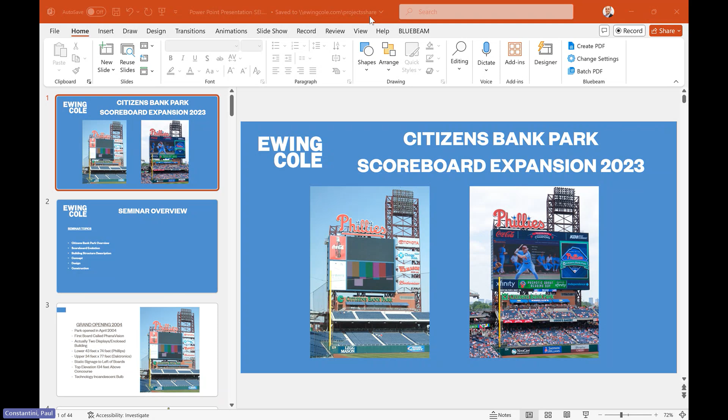Hopefully everybody will enjoy a little bit of this behind-the-scenes tour of what the Scoreboard structure is and get to learn a little bit about how we were able to pull it off.

I'm basically going to tee this one up for Mary, give you a brief introduction, and then Mary's going to really walk you through, as the lead structural engineer on the project, how we were able to work with the ownership of the Phillies and our interior architects to come up with a display board that would work for them and how to make it all come together.

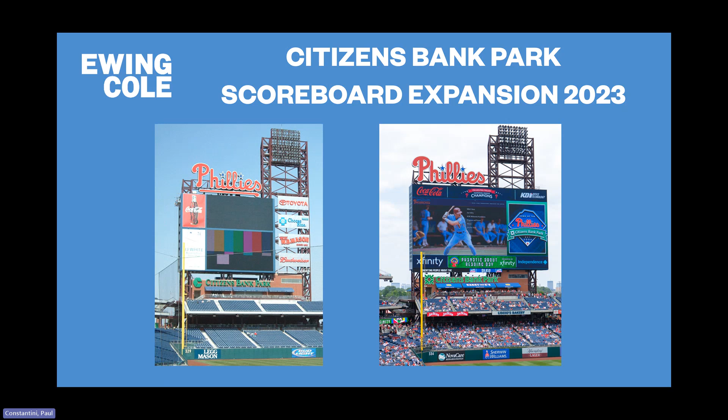So to start with, you could see basically what the park started as and where we ended up, and hopefully you'll have a better understanding of what went behind the scenes, the drawings, and the calculations to make this all come about.

We intend to cover a whole bunch of topics, ranging from a brief overview of the park's evolution from its original design and construction in the early 2000s, to the Scoreboard evolution as the park evolved through different phases from 2004 to present day.

And then we'll get a little more in depth with what the physical Scoreboard structure is, the concept of how we were able to look at various opportunities for Scoreboard displays, and then go through the design and construction.

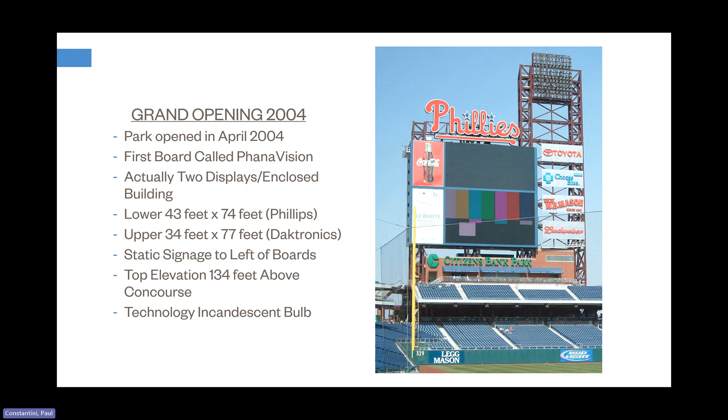Citizens Bank Park opened in 2004, designed by Ewing Cole. The first board ever displayed was actually a combined board of two different displays. The lower display was a Phillips product, and there were two different display manufacturers for the original board. The lower board was around 43 feet by 74 feet.

The upper board was 34 feet by 77 feet, topping out at around 134 feet above the concourse level, which is down at the seating.

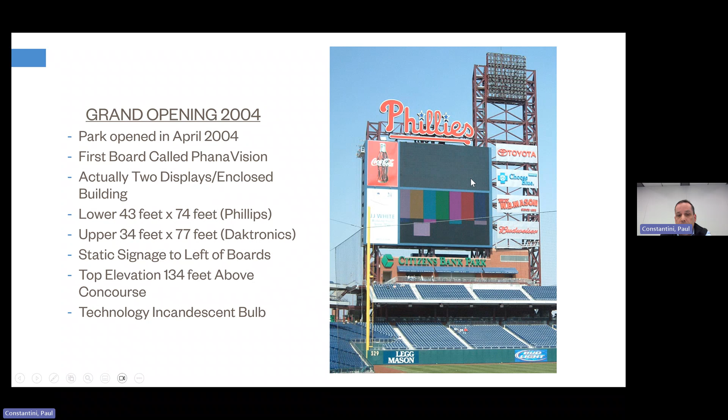There was also some static signage over the area of the Scoreboard, and lighting displays or lighting arrays for the field lighting. The original Scoreboard technology was in its infancy, using incandescent bulb technology.

A little bit of behind the scenes of what makes up the Scoreboard area and that whole structure — we call it the Scoreboard building. That building is located and supported off of the box columns that are part of the lighting arrays and the support of the video board.

The video board sits proud of the structure for the display and lighting arrays, providing access for catwalks and various service to the back of the board for its operation.

Below the video board building is some restaurant space, then the seating tiers, and further below grade you've got service utility tunnel work and other behind-the-scenes infrastructure associated with ballpark operations.

Mary will talk a lot about the substructure and the structure of the display support, because it was all critical to evaluate what we were actually going to be able to accommodate with the existing structure for the new display.

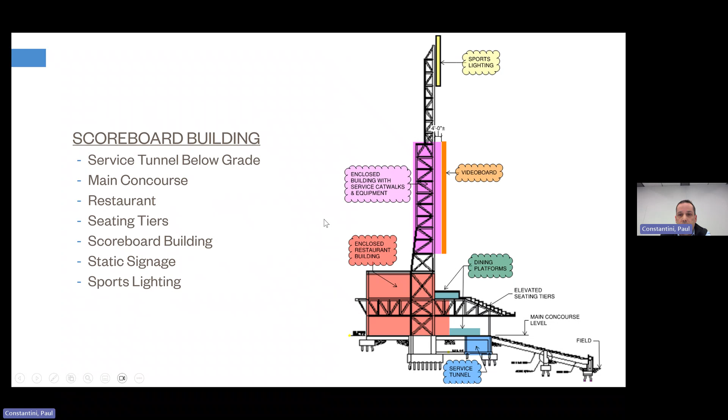Quickly looking at the display structure — this is an early photograph of it under construction back in the early 2000s. You can see it's primarily 4 large box columns there to support both the display board and the field lighting array.

The 2 box columns that support the display board top out at about 150 feet above the concourse level, whereas the sports lighting array tower goes up another 50 feet higher, to around 200 feet above the concourse for the sports lighting arrays.

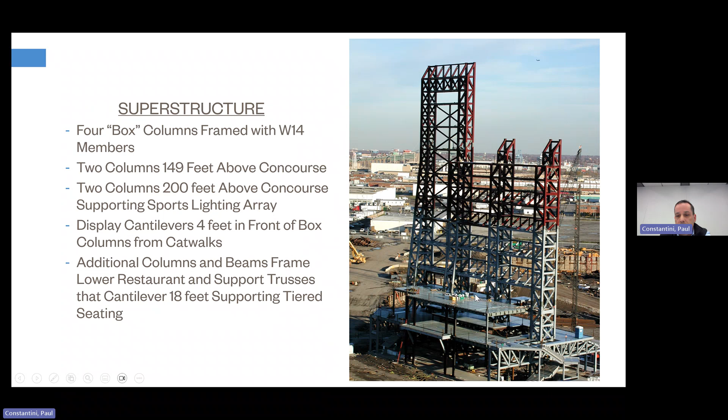As I mentioned, the display itself for the video board cantilevers off of this structure towards the field around 4 feet, providing room for catwalks and service access to the display modules from behind. There's also additional framing, beams, columns, and trusses that support the various seating tiers and the elevated floor over the restaurant area.

A little bit about foundations. The foundations are a very deep structure. They're 120-ton steel, roughly 12 3/4 inch diameter pipe piles. And each of the box columns, with different loading and wind loading on it, has pile support.

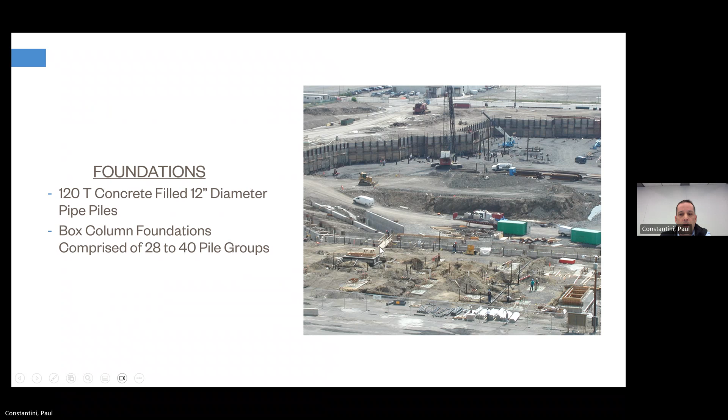In 2011, around 7 or 8 years after the park was opened, the Phillies wanted to entertain an upgrade to the display. So in 2011 they rolled out a high-def display, which took the two displays original to the ballpark in 2004 and combined them into one large display measuring around 76 feet by 98 feet, with the Phillies logo on top. At the time, it was one of Major League Baseball's largest displays.

The elevation of the display didn't really change much from what it was originally. I think the original one was at 134 feet, and this new display came in at 134 feet as well, roughly the same size and orientation, maintaining the static signage to the center field side of the lighting tower. It was basically combining the two displays into one larger display.

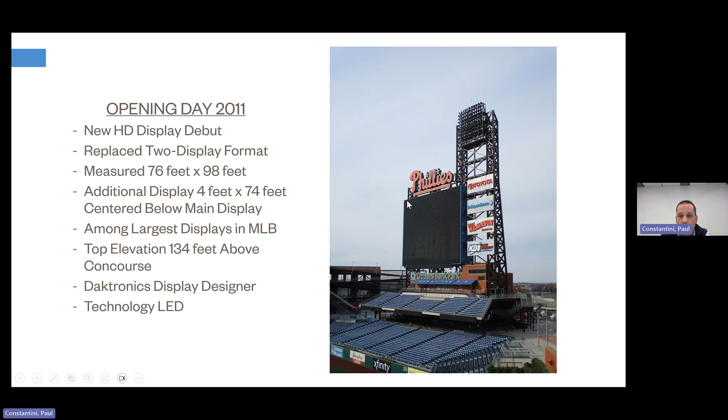There were some modifications made at the time, and Mary talks a little about how we made that all come together with the support of the display structure and the catwalk access. Significant to the technology was that it was more of an LED and high-def format versus the incandescent bulbs of the original ballpark.

So before I turn it over to Mary, just to finish my tee-up for her design, we're going to fast forward, or rewind, back to the 2021 spring timeframe when we were approached by the Phillies to start entertaining options of: hey, what could we build? What are the opportunities here for this display? How big could we make it?

So that was our basic introduction, to start looking at the structure, look at other major league ballparks — what are the other parks doing for their boards, where are they located, what are their sizes — and then try to start doing some test fits for everything. So with that said, it's time to turn it over to Mary, and she can go into picking it up from those early concept sketches to the actual design.

Thank you, Paul. So when the Phillies first engaged us in the middle of 2022 to look at what could be possible, they looked at a wide range of scoreboard sizes and configurations relative to the structure. They also looked at different locations throughout the ballpark, but quickly ruled those out and determined they wanted to stick with the existing scoreboard location in left field.

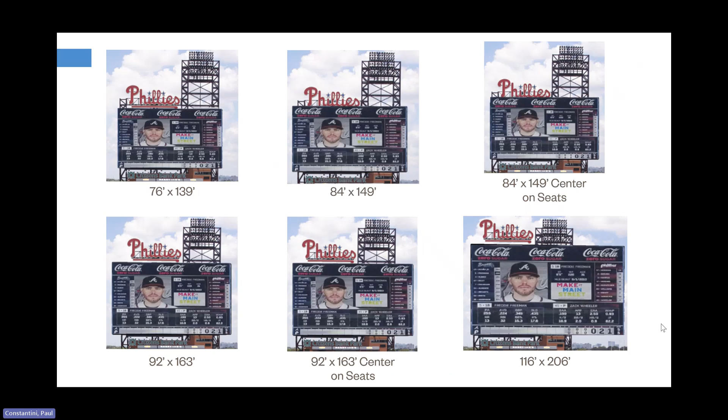So the video board size we determined was the largest we could accommodate ended up being 152 feet wide by 82 feet high. You can see that red box drawn on top of the picture shows roughly what the existing board size had been — the board got significantly wider and about 6 feet taller.

And I apologize for the Atlanta Braves player on the scoreboard screen — I'm not responsible for this image. I guess one of our architects must not have been a Phillies fan.

I'm not really sure how that wound up in these renderings.

The board size we ended up with had a weight of 116,300 pounds. In addition to the main display, there is a caption board beneath that is 98 feet wide by 4 feet tall. There's also a Phillies sign above the video board, replaced in a similar design to what had been there, although it did need to raise higher because of the video board getting taller. The architects also felt the scale of the sign was a little too small with the larger board, so it got overall larger.

That sign is 27 feet high at the P, which is the highest letter. On the back of this video board building, there is a Citizens Bank Park sign. It is the same as the original sign, but we had to relocate it so it would be at the top of the building and centered on the back, so it needed to move with the new geometry.

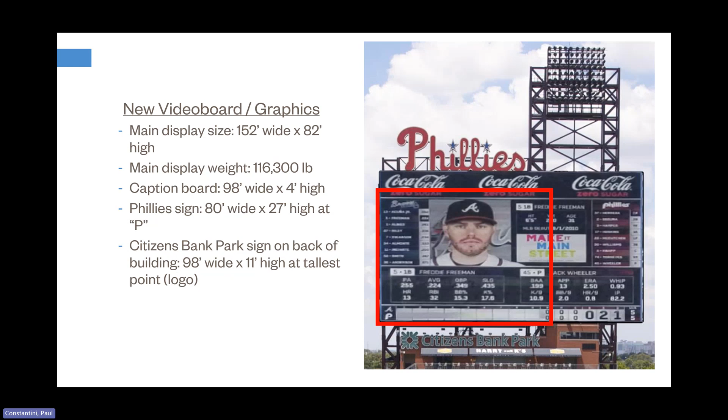I'll talk a minute about the design schedule. We started these concept studies — I think I had my dates wrong when I said '22 before. We started the concept studies in late 2021, and that's when we ran through all the different board sizes and presented the options to the Phillies. They chose that final size by the end of the year.

In January of 2022, we began working on the design of the chosen board. We issued a GMP set in March of '22 and construction documents in June, then a permit set in July. We also followed with various design addendums throughout the remainder of the year.

Now I'll talk about the new structure required to support this larger video board. The first piece is we had to extend the existing columns, and there were 3 different types of extensions that we needed to use.

The first one I've labeled as number 1 on the screen. That is the light tower column that previously did not support the video board — it only supported static signage. The video board stopped short of that column, so architecturally, the design of that column had a sloped back to it since it was exposed and visible. That was an architectural decision.

But now with the wider video board, we needed the building behind it to extend to the same width. So we had to install a plumb column at the back and add some additional bracing members to straighten out that column and form the back of the building.

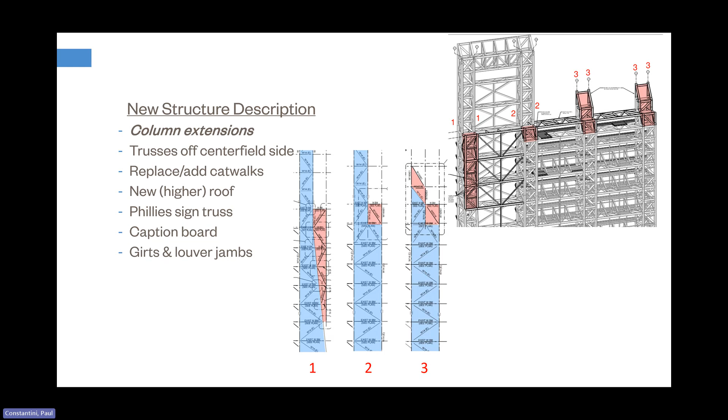Column extension type 3 are the 2 box columns that extend up to support the Phillies sign but do not have light arrays associated with them. For those, they just had to raise up again about 9 feet to raise the roof of the scoreboard building, but also provide support higher for the new, higher Phillies sign.

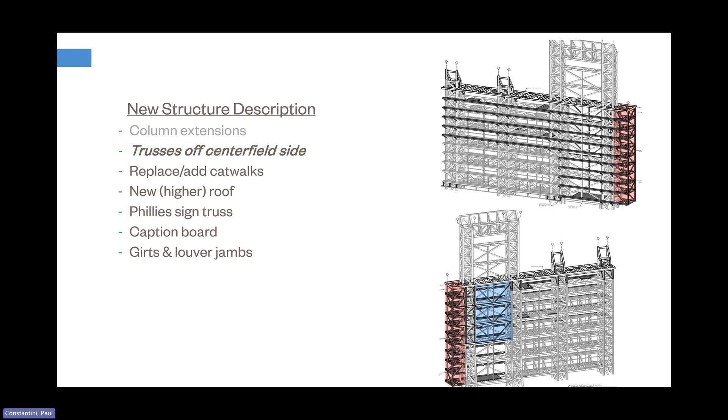The second piece of new structure we needed to add were boxes to cantilever off the center field side of the structure to support that overhanging video board. The cantilever length on these is about 12 feet, so we just had to add some new columns out at the corners of the building and some bracing elements.

We also had to add to and replace some of the existing catwalks. These are the roughly 3-foot wide grating platforms that exist between the back of the video board and the front of the scoreboard columns, providing access for servicing the video board. Some of the existing catwalks we were able to reuse, but the upper levels needed to be replaced over their entire length, and we had to make them wider to cover the full width of the video board.

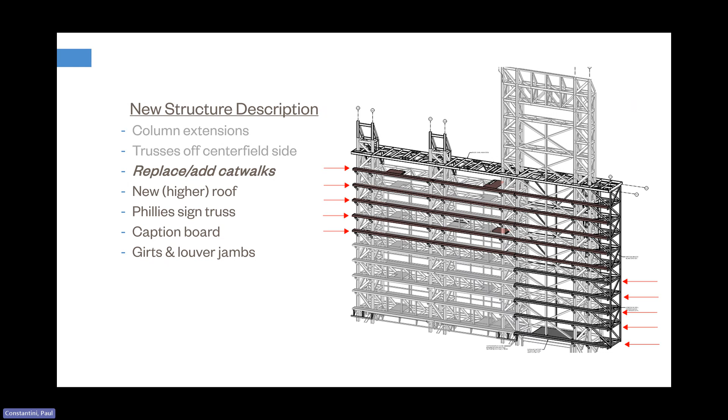The next piece of new structure is the new, higher roof. This really just moves the roof of the building up by about one column panel point, so about 9 feet. We had to add that new roof framing, and then we needed to add some support for the Phillies signage. The direct support of the sign itself was by the signage manufacturer, but we did have to give them points of attachment on the main structure.

And we came up with this design for a triangular shaped truss that gave them the ability to support their sign. Now, the caption board below the main video display previously did not extend as wide as the new design called for, so we did have to add some additional framing there to support the increased width of the caption board.

And then now looking at the back of the building, highlighted in red is all of the girts that we needed to add to support the metal panel cladding. And at each end of the structure, there were louvers at every level to support the ventilation required for all of the equipment.

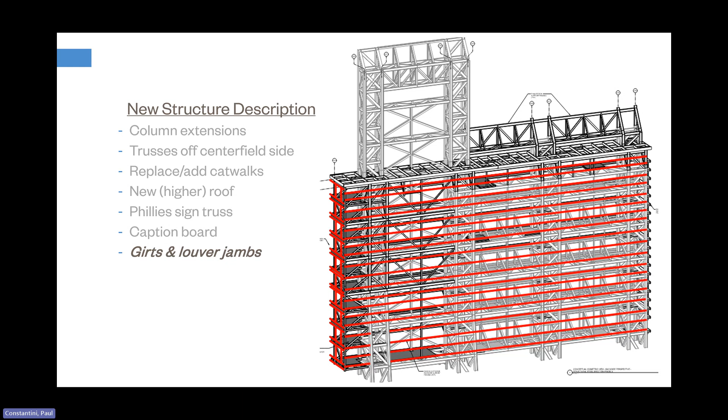Now we'll get into a little bit about how we tackled the structural design.

Ewing Cole was the original engineer of record for the ballpark. So with that, we had some advantages in that we had access to some of the original design models that were used. But back in the early 2000s, a lot of the analysis was done in these 2D STAAD bents, where you might take a grid line and have all of the framing associated with that grid line, load it up and analyze it and see what happens. So we did have access to some of these existing models in the 2D world that we were able to locate and validate, checking member sizes, geometries, releases, and the loads applied to the structure.

So we were able to find 1 or 2 bents. We didn't have one for each of the 8 grid lines, but we were able to find 1 or 2 that were relatively accurate, and then update them to current loading and extrapolate, save as, and create models for each of the 8 grid lines.

Now, for each of those 8 grid lines, we had an existing condition model that just showed how the structure was loaded originally, and then we had our model of the proposed conditions with the new larger board, so that we could compare easily between the existing condition and what we were trying to accomplish with the new design.

I think I went too far. Okay.

So the wind loading on the structure, we needed to update to IBC 2018 or ASCE 7-16. We did have some information from the original design regarding a wind tunnel study that was done, and some of the BOCA loads that were applied to the structure originally. But with the level of modifications that we were making, we felt we needed to update to the current wind codes. So for the main wind force resisting system, we had a number of loads applied.

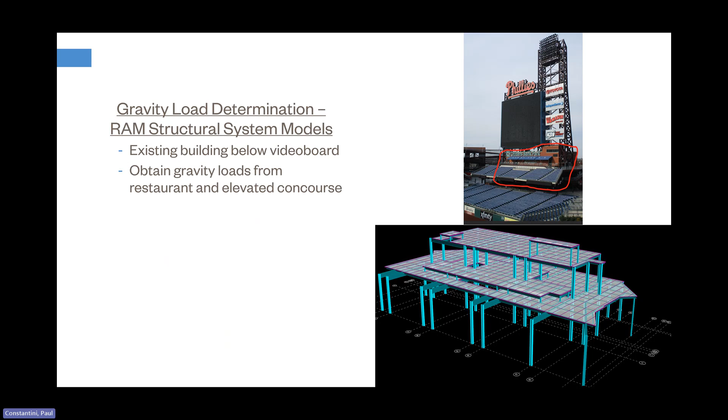So in order to validate that, we created some RAM models. This first RAM model on your screen is the superstructure of that restaurant building below the video board. It's what exists above the main concourse, but below the video board. So we use this RAM structural system model to model all of the floor framing and take those reactions and apply them to our 2D STAAD bents.

Going too far, I think. Oh, there's my second one.

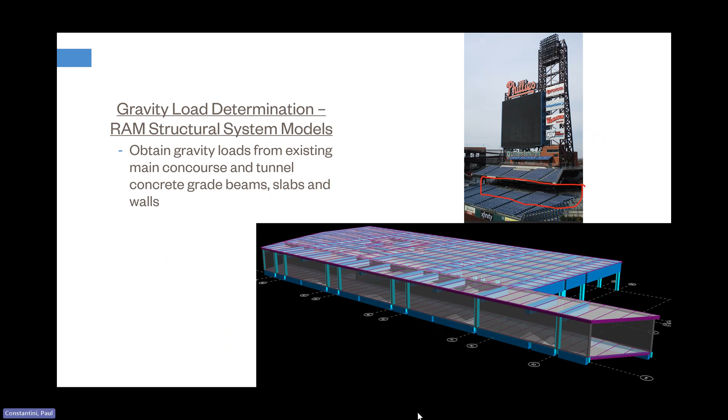Okay, then we had a second RAM structural system model that we used to model the main concourse and everything below that. The main concourse is a concrete framed slab with grade beams. And then below the main concourse, there's a service tunnel that runs around the entire perimeter of the ballpark. We had the loads of that service tunnel to consider as well when looking at the foundations, just trying to capture all of the loads on the foundations.

Next, to determine the loading from the catwalks, we created this 3D STAAD model. The primary purpose of this was to design those catwalks and to design the cantilevered framing off the center field side, and then also take the reactions from this new framing and apply them again back to those 2D STAAD bents.

I'm not sure why these slides, I'm having trouble getting them to advance. I apologize.

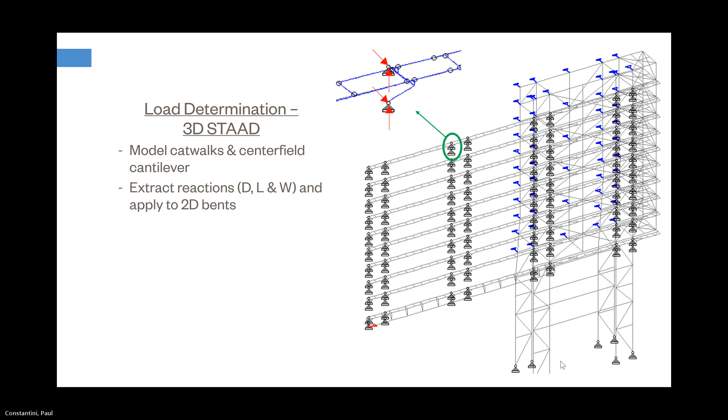This is an image showing how we took those reactions and applied them back to the 2D STAAD bents.

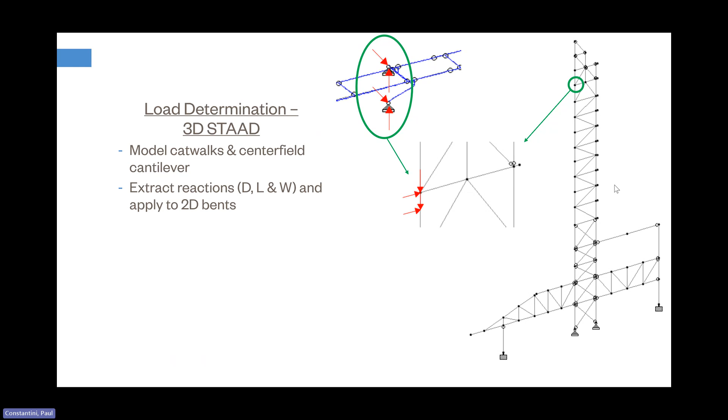Now looking back at that 3D STAAD model again, we used that to design the catwalk framing. The catwalk framing needed to support the weight of the video board, but it also had some strict deflection criteria associated with it, given to us by Daktronics, who is the video board manufacturer.

At the time of installation, over the entire length of the catwalk, there could not be more than a half inch of differential elevation. Once the video board was installed, there was a limit of L/400 for permanent loads and a limit of L/240 for short-term loads. But probably the most limiting piece was that there could not be any inflection points in the deflection diagram.

This is quite a long catwalk, and it needed to be constructed in several pieces. Those splices between the different pieces of catwalk needed to have a moment connection in order to get a smooth deflected shape, because the video board would not have responded well if there was a kink in the deflected shape.

So we used this 3D model to check the existing catwalks, and we determined that levels 1 through 5 of the existing catwalks were adequate, but they did lack the continuity we needed to keep the deflected shape smooth. So we had to add some additional plates to get a moment splice between the existing catwalk sections to get that smooth deflected shape.

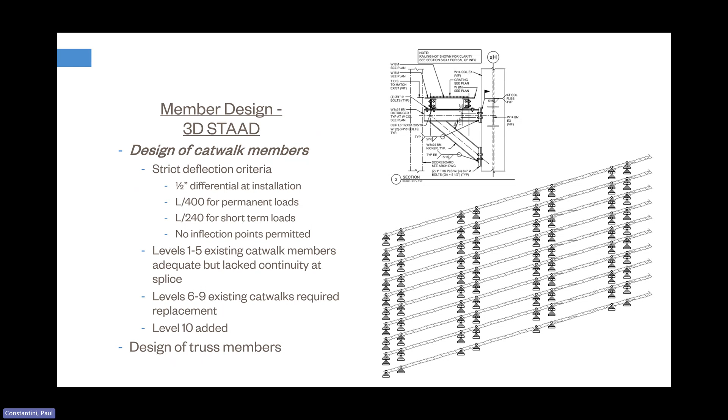And we did also use this 3D model to design the truss members. Here we have the 12-foot cantilever that overhangs on the center field side of the structure, and we needed to create a backspan to support that cantilever.

That was done with two different types of trusses. The front truss, which is highlighted in green, has the cantilevered framing, but the supports of that truss are the front faces of those two boxed columns. We had backspan framing between the two box columns to support that cantilever.

All of that backspan framing was existing, so we were able to get the sizes and connections off of the shop drawings and check the strength of those members and also the strength of the connections. We determined that the existing framing was adequate.

Now at the back was a little bit different because of the column extensions we had to install there. We had the cantilever framing off the center field side, and then the new column extensions, which form the supports of that truss, and the backspan framing, those vertical and diagonal members highlighted in orange, were all new as well.

So the back truss was a little bit different. We had a little bit more flexibility with what we were going to do there since it was a lot of new framing, so we were just able to design those members and get forces to design the connections.

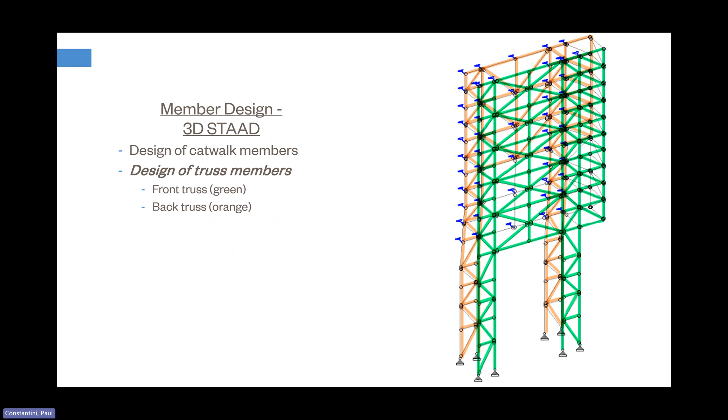Now, getting back to those 2D STAAD bents, which really were the heart of our analysis, we used those bents to verify the capacity of the existing members and to size the new members of the column extensions.

We also used it to verify that we were happy with the column deflection we were seeing at the top of those columns under full wind loading. Really, these columns are quite stiff, so the deflection at the top was not really substantial. We felt comfortable with what we were seeing there.

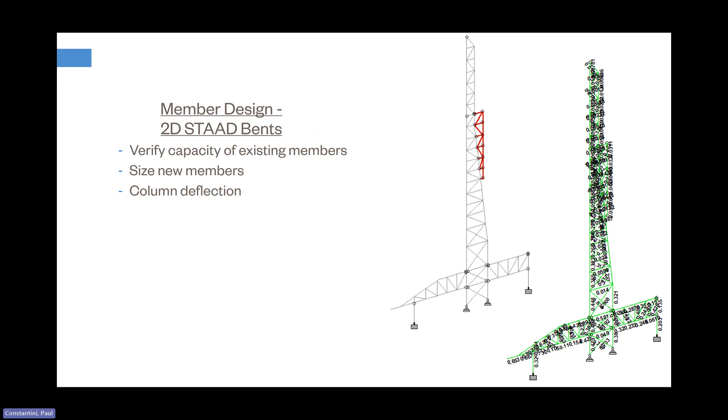We relied heavily on the 10% rule of IEBC section 1103.2. The idea is for any connection that did not see more than a 10% increase in demand capacity ratio, we did not need to check it for updated codes. So we compared our existing models to our new models and determined that 193 connections did not see more than a 10% increase, so we didn't need to look any closer at those. But there were 246 connections that needed detailed checks.

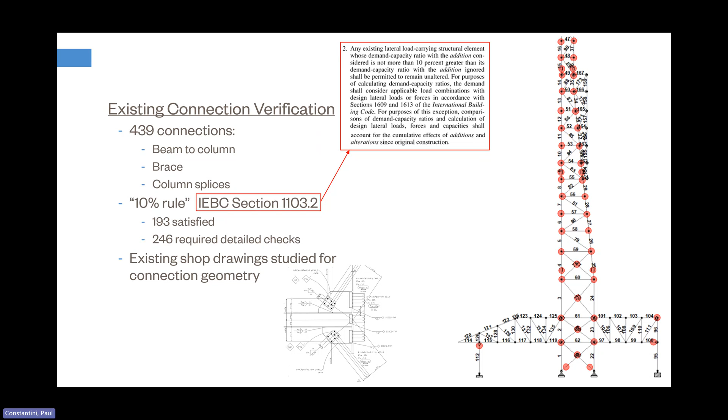For those, we were fortunate to have access to the existing shop drawings, so we could get bolt sizes, weld sizes, gusset plate geometry and thickness for each connection. We used RAM Connection to check those connections. We had an in-house spreadsheet so we could copy and paste forces out of STAAD, have the spreadsheet reorganize the output into the format RAM connection needed, making it easy to move data between the two programs.

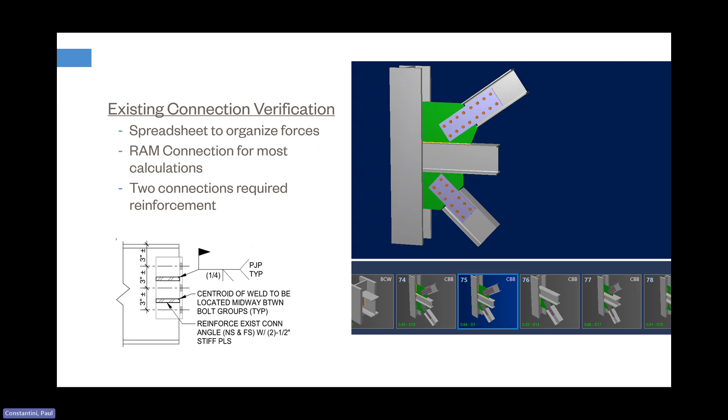At the end of the day, we checked those 200-some connections and determined there were two that needed to be reinforced. These were areas where the new framing delivered a large lateral force into a connection that previously had no force delivered into it. The failure mechanism was prying of the bolts in the beam to column connection, so we added stiffener plates to eliminate that prying action and get additional capacity out of the bolts.

And a half-inch stiffener plate framing between those two vertical plates. A lot of this analysis of the plate thickness and required welds was performed by hand, since we did not have any in-house program we could easily plug this into.

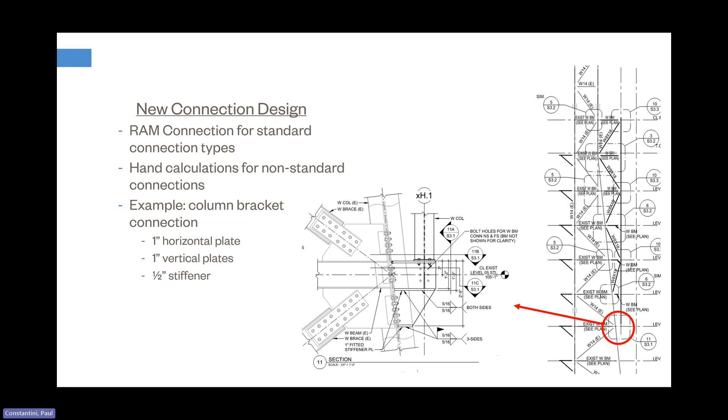Once we got through all of the steel design, we needed to look at the foundations and verify that our concept level calculations were still valid and that we didn't need to reinforce anything. Starting from the top down, we looked at the base plates, which were 4-inch thick with 12 2-inch diameter anchor bolts anchoring them down. We used RAM connection to check the base plate thickness.

We used hand calculations to justify the concrete breakout of these anchors due to tension and shear, using the pedestal reinforcing as anchor reinforcing to restrain that breakout. We then used an in-house spreadsheet to check the anchor rods for bending, since these columns do not have shear lugs, so all of the shear needed to be taken by the anchor rods.

At the bottom of the anchor rods are large anchor plates, so we did hand calculations to verify that plate thickness was adequate to bear the tension load from these anchor rods into the concrete.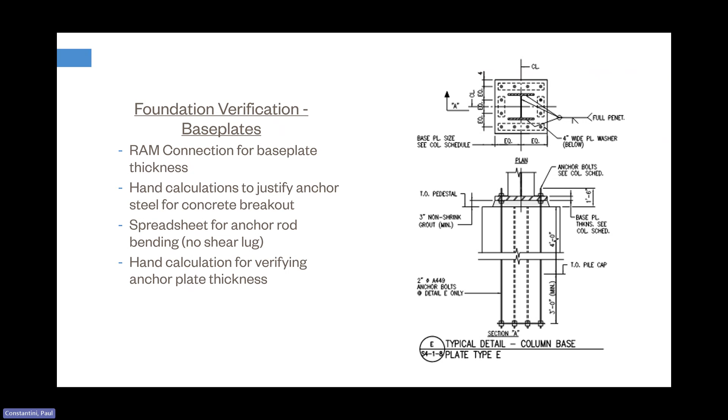Next, we looked at the concrete pedestals that the base plates sit on. There's really nothing too interesting to talk about there—they were concrete columns. We used RAM elements to get the interaction diagrams of the columns and verify their capacity was adequate.

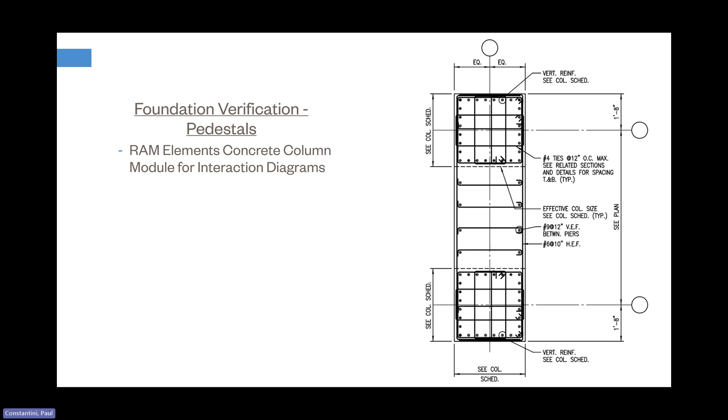Next was the piles and pile caps. As Paul mentioned earlier, the piles are 120-ton concrete filled 12.75-inch diameter steel pipe piles. That 120 tons is the compression capacity. They also have a capacity of 40 tons in tension.

There were 4 of these large pile caps under the box columns, and depending on which one you're looking at, there was anywhere from 28 to 40 piles per pile cap. The pile caps are 6 foot thick, and they are designed for the capacity of the pile. So we knew if we ran through a load distribution to each of these piles, as long as the pile capacity was not exceeded, the pile cap was going to be adequate as well.

So we have an in-house spreadsheet that we used to take the loads from the columns, apply those loads in the right locations, and figure out the load distribution to the piles. And we did determine that no pile was overstressed, so we did not need to do any reinforcing there.

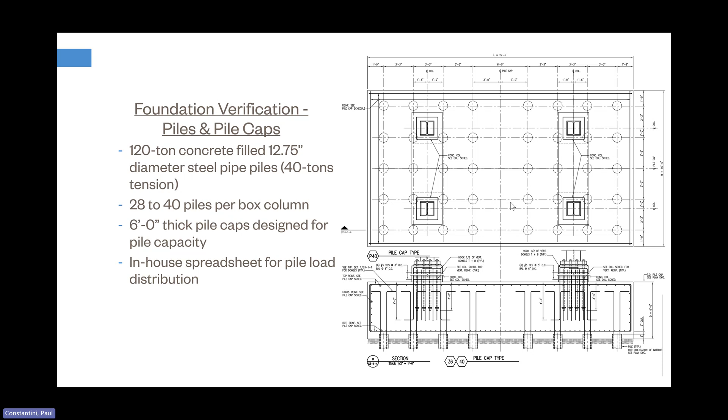Next, we'll get into the construction phase a little bit. The general contractor was LF Driscoll, the steel fabricator and erector was Berlin Steel, and the scoreboard manufacturer was Daktronics. Of course, there were many other players involved in erecting and building this structure, but these were the 3 that we mainly dealt with as the structural engineers.

So the schedule of construction in early 2022, some of the contractors were on board providing pre-construction services. By July of 22, we were already getting shop drawings to start reviewing some pieces. In August of 22, some of the contractors were able to do some early mobilization and get started.

By October, that was the last scheduled regular season game. However, this was the year that the Phillies advanced all the way to the World Series, so the start of construction was delayed a little bit due to that. And it wasn't until about November 8th of 22 that full-scale demolition began.

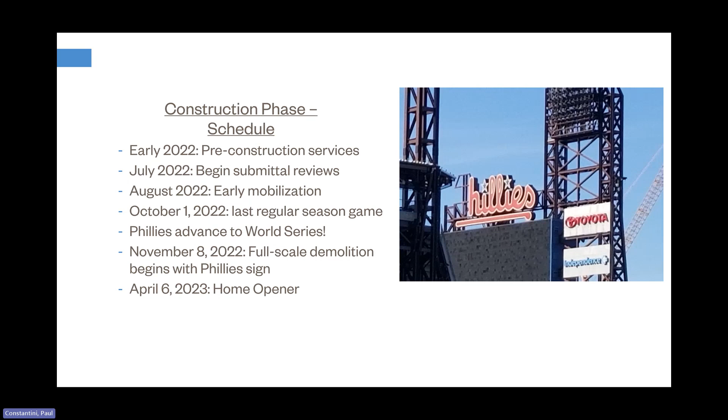And then the end goal was to have everything open and operational by April 6th of 2023. The Phillies did ask to have the building turned over to them a little bit earlier than that so that they would have time to test the board, do training on the board, and all of the things that they needed to do to be able to really run with it on opening day. But April 6th was the end date when everything had to be working.

As I mentioned, some of the contractors had pre-construction services. One of them was Daktronics, the video board manufacturer. When we were still in the design phase, they were providing us with guidance on deflection criteria of what their board could accommodate in terms of deflection. They were also giving us some sample connections of how that video board would attach back to the structure.

Berlin Steel was involved early on, giving us guidance on availability of member sizes. With the tight construction schedule, we didn't want to end up in a place where we're specing a member size that had a long lead time. So they gave us some guidance on what we should and shouldn't be specifying in terms of member sizes.

They did also provide some feedback on the types of connections that they wanted to see, and there was a very strong preference for bolted connections just to eliminate the amount of field welding and really speed the schedule.

Another piece that they had some input on was the construction sequencing of these cantilevers that overhang on the center field side. The boxes at each level is about 9 feet tall, and then the plan dimension of that cantilever is about 12 feet by 12 feet. We initially thought that that was going to be too big to ship and thought that all of this cantilever would have to be stick built in the field.

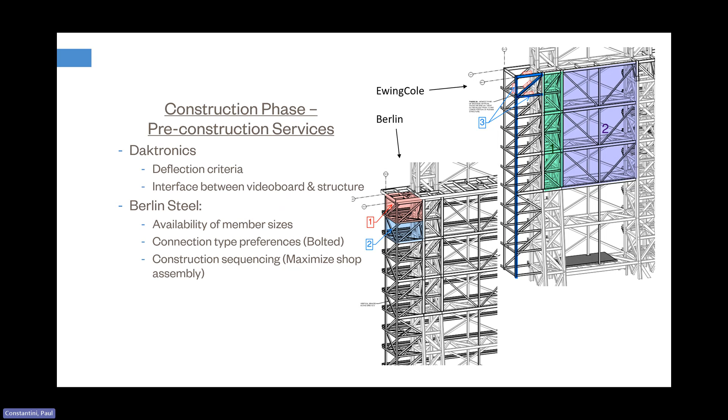Now for steel submittals, we had 12 sequences of steel that we reviewed, and that was based on the installation timeline. We were reviewing these shop drawings between July and November of 22.

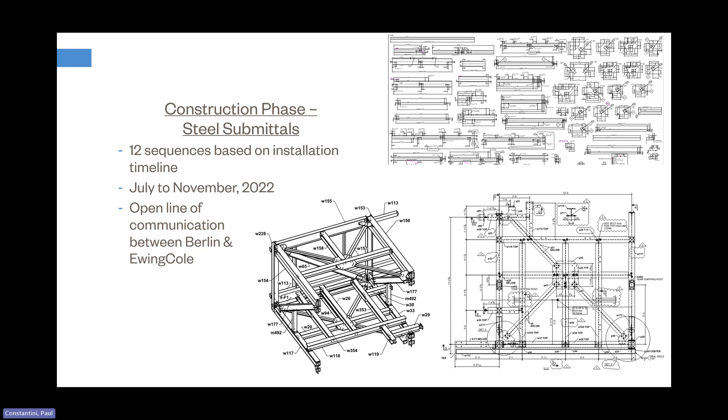We did have an open line of communication between EwingCole and Berlin Steel, so that when we would get these shop drawings in, we would do our initial review. We would often hop on the phone with them at the end of the review and say, hey, this is what we're seeing, what were you thinking here? And they might explain something to us and say, oh, you know what, that makes sense, maybe we need to rethink how we did that. Other times, maybe it was a misunderstanding, but through those phone calls, we were able to all get on the same page, adjust our comments accordingly, and hopefully limit the number of reviews that the shop drawings needed to go through. So I think typically any reviews were limited to no more than 2 submissions.

Early mobilization started in maybe August of '22. Some of the contractors were able to get in and survey existing conditions. They installed protective measures on the roof to protect the existing structure, some select demolition occurred, and they were able to install small connection elements that wouldn't really be visible from the ground.

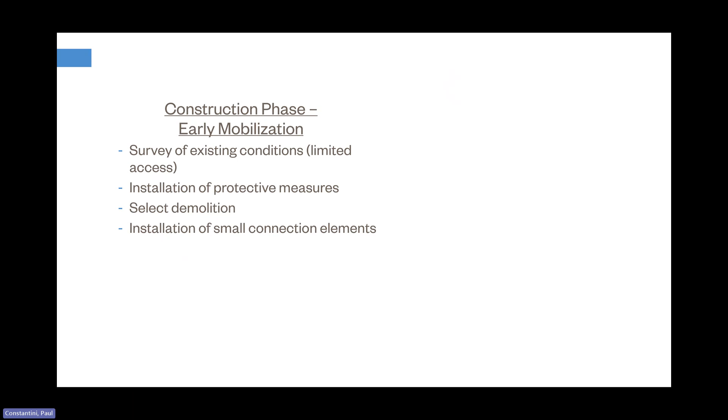Steel erection began immediately following demolition. The first box, I don't know the exact date, but that first box you see going up and getting ready to be hung at the top of the structure went in sometime in early December of '22.

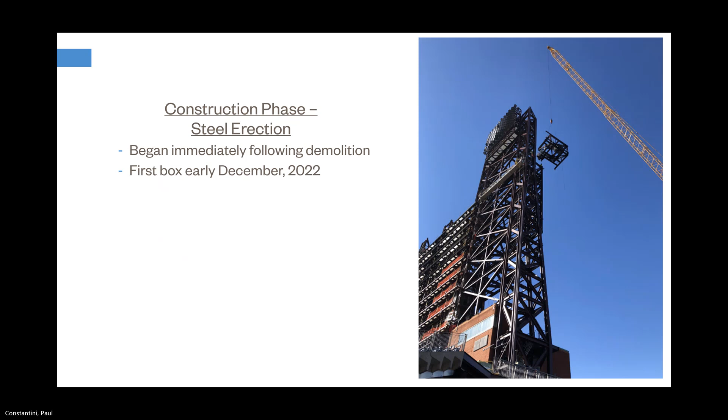Now, any job going into construction, there are always field issues that come up that nobody anticipated. So we had to react quickly to those because of the tight construction timeline.

But Berlin was able to get out, survey these bolt hole locations and sizes, and we were able to reuse a few of them and otherwise work around them by modifying our connection geometry to miss those bolts. That's just one example of one of those issues that came up that we had to react quickly to and get some answers.

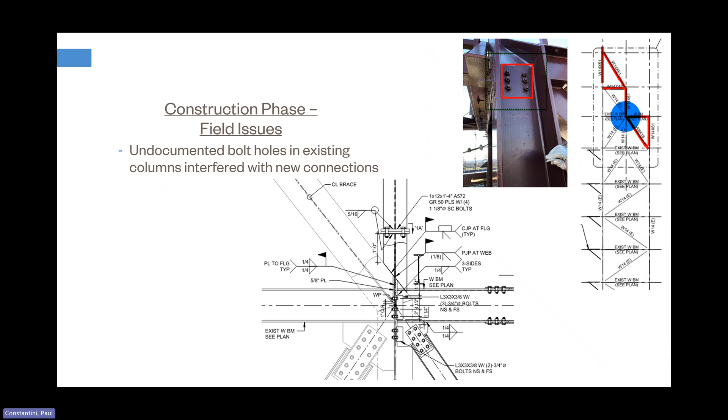Another challenge was for the catwalks. We had a mix of existing and new catwalks, and the intent was that the new catwalks would closely match the existing in terms of how far they project out from the columns. The scoreboard manufacturer, of course, wanted a uniform plane to make their attachments to.

When we were designing our new catwalks, we based those dimensions on the shop drawings we had for the existing catwalks. But once the building was opened up and they were able to survey those existing catwalks, we found that they actually didn't stick out as far as we thought based on the shop drawings. So our new catwalks projected several inches beyond where the existing catwalks were.

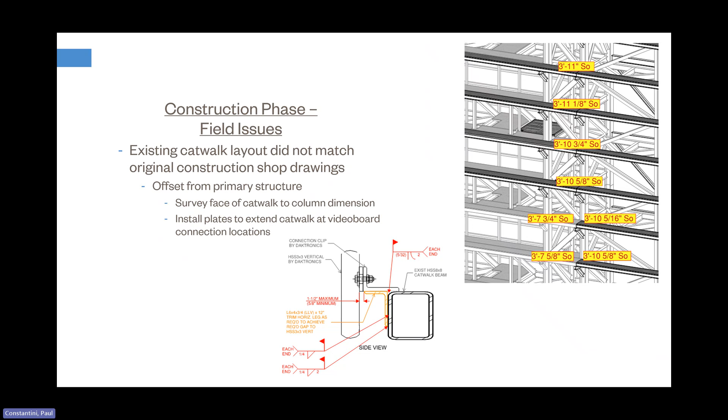So Driscoll and Berlin surveyors were able to get out there and survey all the different points on the catwalks. And we came up with a bracket connection that we could install on the face of the existing catwalks to extend that plane out a little bit, so that Daktronics would have a uniform plane to make their connections for the video board.

Finally, there are some coordination things that had to take place during construction because we just didn't have the information during design. One of those things is a gap that exists between the video board and the catwalk.

At the top of the screen, you can see my little image there. The blue is the video board, and Daktronics has these 3x3 HSS vertical members that run behind the video board to support it, and those members are attached back to the catwalk. So just the way the framing is laid out, it results in a gap between the video board and the catwalk structure.

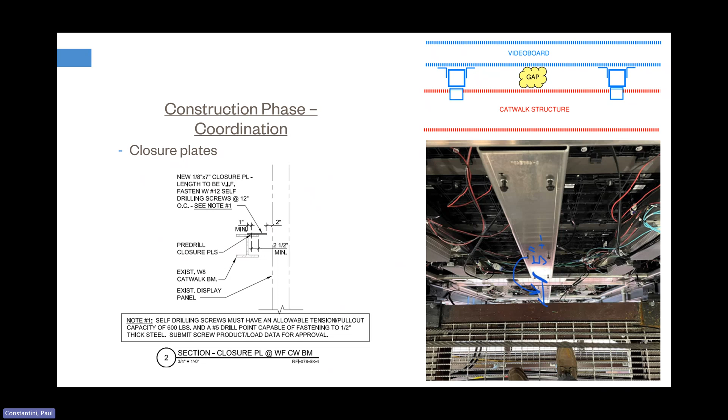So once the video board was in place and all the adjustments were made, they were able to go out and survey these gaps and give us some dimensions, and we were able to come up with a detail to install closure plates so that nobody could drop tools or get their foot stuck in that gap.

So now some final thoughts. We have some statistics provided by Berlin that I found pretty interesting. There were 1,126 field drilled bolt holes installed for this project, and 11,700 field bolts installed. In terms of welding, there were 114 worker days of welding, 10,000 inches of fillet welds, 896 inches of PJP or CJP groove welds, and 1,460 inches of flare bevel welds.

All of that work was completed by the end of January 2023, and the board was indeed fully operational in time for opening day on April 6th, 2023.

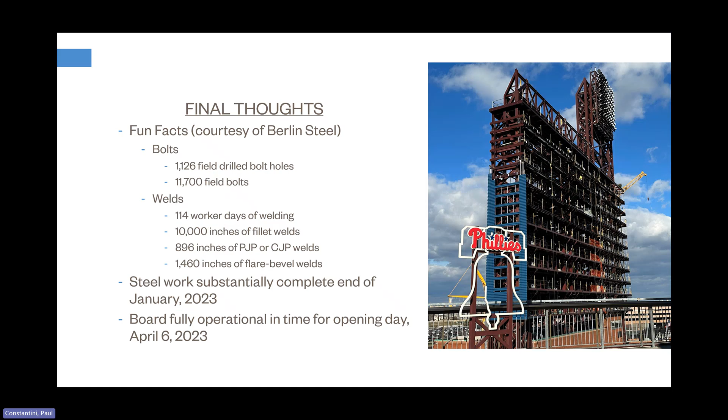Thank you. All right, excellent.